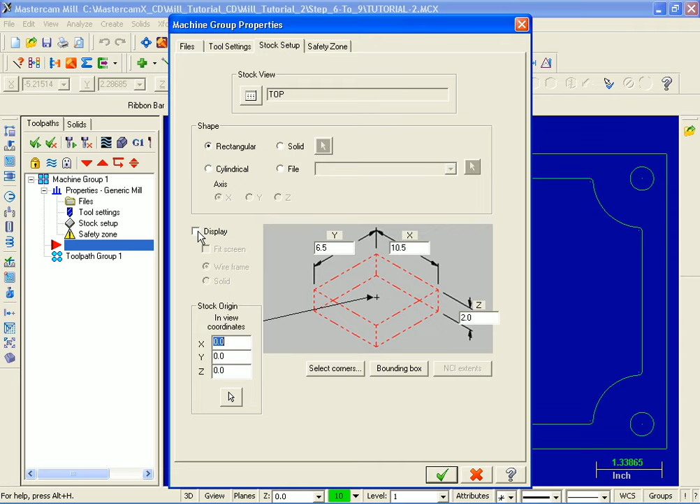Moving on up, I'm going to turn the display on and also put a check mark against Fit Screen. Next, moving up to the top, I'm going to select the Tool Settings tab. Our feed calculation is going to be taken from Tool. If we move over to the right in the toolpath configuration area, I'm going to switch on assign tool numbers sequentially and also check mark warn of duplicate tool numbers.

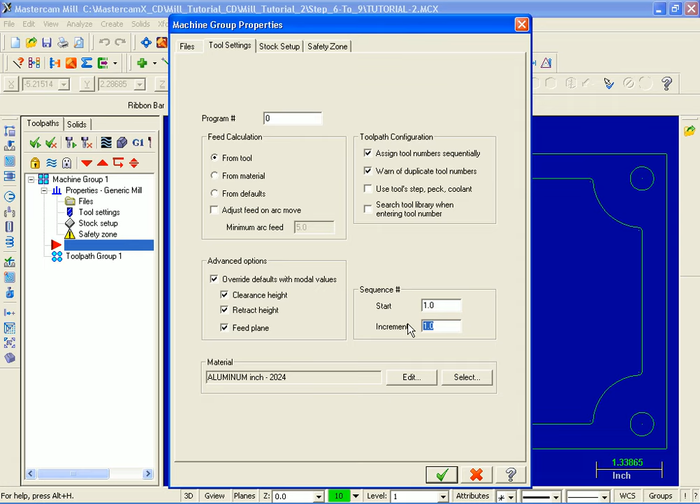Moving on down now into the advanced options section, I'm going to check override defaults with modal values and switch on clearance, retract and the feed plane. Moving over to the sequence number, I'm going to change the start to 1 and the increments to 1 also. Everything looks great here. I'm going to go down the bottom and hit the OK button.

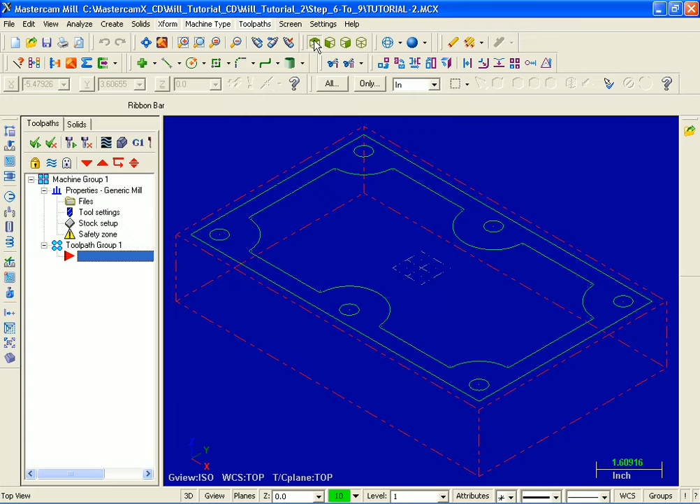Let's move on up and select the isometric view button followed by screen fit. As you can see, the red dashed lines represent the stock we've just set up. Let's move on up to the top now, and I'm going to select top view and again screen fit.

For step 7 we're going to spot drill the 6 holes. I'm going to select tool paths and then drill toolpath. Moving over into the drill point selection dialog box, I'm going to pick mask on arc. Now the prompt select arc to match, I'm going to pick this top left hand circle. As you can see, it selected it and the diameter here is 0.48438.

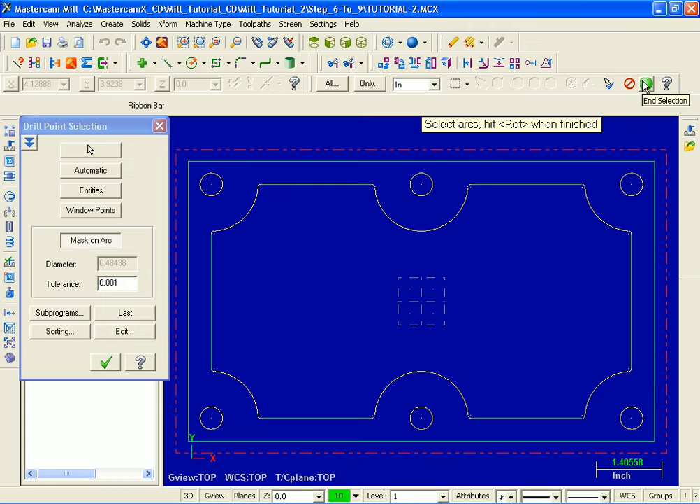Next I'm going to draw a window around the whole part, and it's selected the remaining 5 holes. I'm going to move up to the top right hand side of the screen and select End Selection followed by OK. Next we need to select a tool. I'm going to move down and hit the Select Library Tool button.

And what I'd like to demonstrate now is how we can use the filter to filter out a specific tool with a given diameter. First of all, in the Tool Types area, I'm going to select None to disable any previous tool selections, and then move on up now and select Spot Drill.

Moving up into the tool diameter, you can see I have it set to equal and it's at 0.75. So everything looks fine here. I'm going to pick the OK button to exit, and it's filtered out the appropriate spot drill. I'm going to select this drill and then pick OK. As you can see, it's set to tool number 1, but for the length offset I'm going to change that to 1.

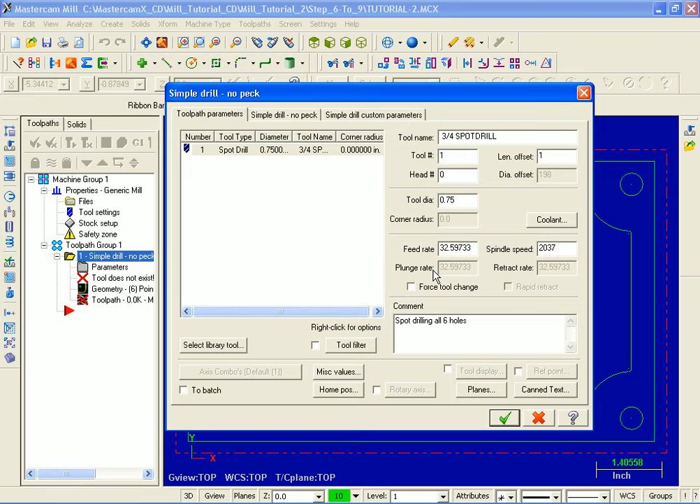I'm going to move on down to the comment section and type in spot drilling all 6 holes. Everything looks good here. What I'd like to do now is move over to simple drill, no peck. I'm going to turn on the clearance. As you can see, it's set to 2 inches and in absolute, so that's good. Moving on down, retract is absolute 0.1, that's great. Top of stock is 0 in absolute.

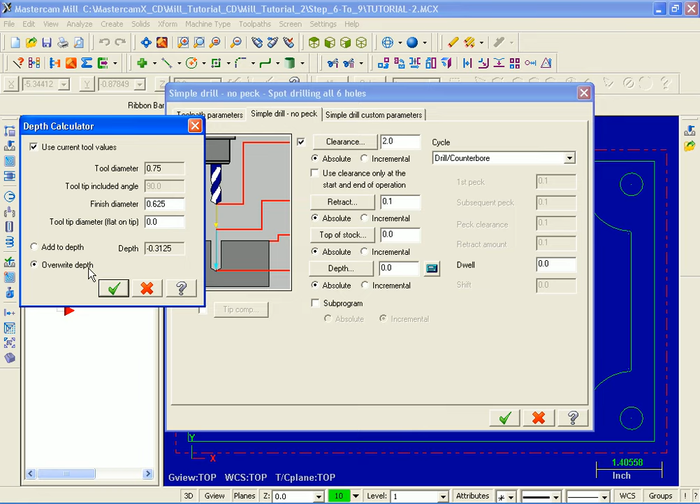Now, for the depth, we want to use the 0.75 diameter spot drill to chamfer the holes. So to calculate the depth, I'm going to select the calculator icon. Now for the finished diameter, what I'm going to do is change 0.75 to 0.625. I'm also going to move down and put a check mark against overwrite depth. I'm now going to select the OK button, and as you can see, it's input the correct depth for me.

Moving up to our cycle, we have it set at drill counterbore, so everything looks great. I'm now going to press the OK button. Now, to change the order in which the holes are spot drilled, what I'm going to do is select the geometry. Next, when the drill points manager appears, I'm going to right mouse button and sort options.

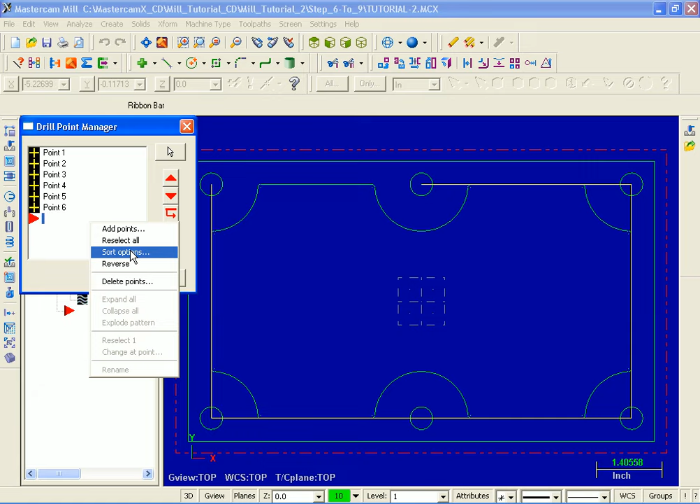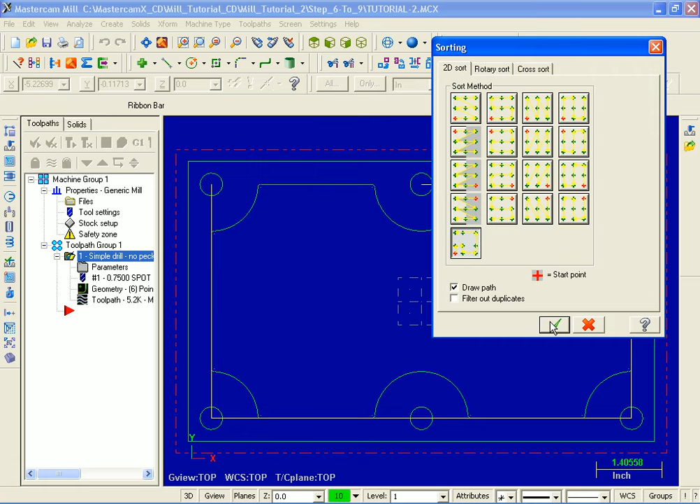Moving on down to the bottom left corner, I'm going to select point to point. I'll move this dialog box over here and pick OK. Now for the prompt, select sorting start point.

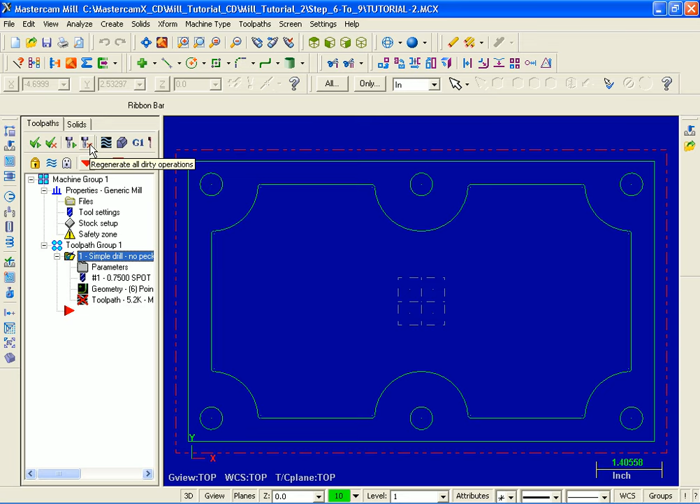I'm going to move over and select our top left hand hole. Everything's been sorted now, so I'm going to pick OK. As you can see, over on the left hand side we've got a red cross. I'm going to move on up and select Regen All Dirty Operations.

Let's move on to step 8. We're going to drill the holes now. Over on the left in the Toolpath Manager, I'm going to right mouse click and pick Copy. As you can see, I've only got one operation selected. I'm going to right click again, and this time paste. So we have 2 operations, and at present they're both exactly the same.

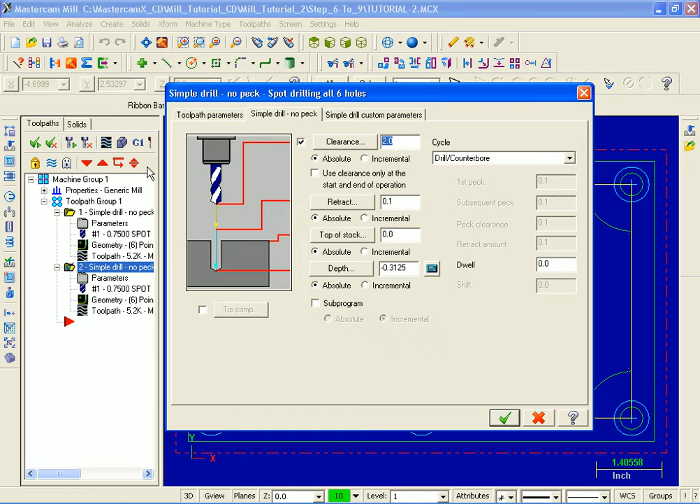For this second operation, I'm going to move into Parameters and select the Toolpath Parameters page. What we need to do now is set up the appropriate drill. I'm going to pick the Select Library tool and pick the Filter button. I'm going to select None and then move on up and pick Drill.

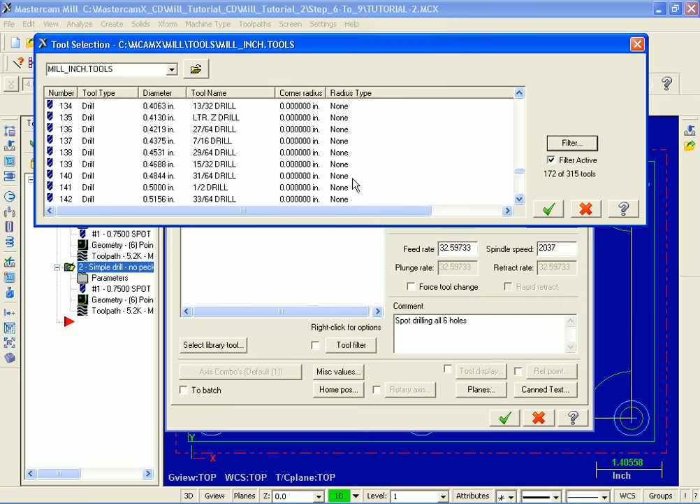For the tool diameter, I'm going to change that to Ignore. I'll move down to the bottom and pick the OK button. Let's scroll down and find our 31/64 diameter drill. There it is. I'm going to select it and pick the OK button.

First of all, we've got tool 2, and for the length offset I'm going to input 2. For the comment I'm going to type in drilling 6. So I've input my comment.

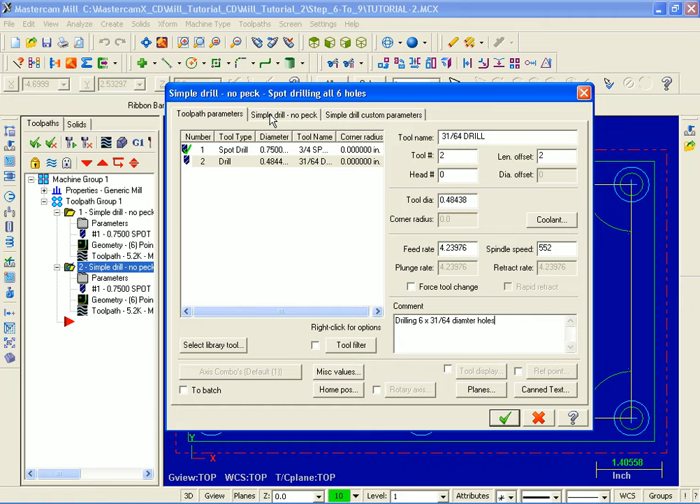Everything looks fine here. Let's move over to simple drill, no peck. Clearance is still on, set at 2. Retract 0.1. Top of stock is 0. The depth, I'm going to change that to -1.4.

I'm going to move down to the left here and switch on tip comp. Now I'm going to press the tip comp button. The breakthrough amount is set to 0.1. I'm just going to change it to 0. I'm going to pick OK.

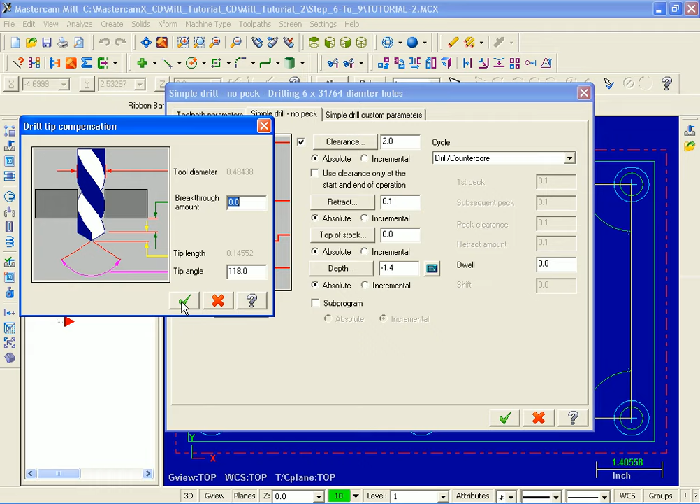Let's move on up now to drill counterbore, and I'm going to change this to peck drill. For the peck amount, I'm going to change that to 0.2. Everything looks great here. Go down to the bottom, hit the OK button.

As you can see, we've got a red mark. Let's go on up top and do a regenerate all dirty operations. Everything looks great. Moving on to step 9.

We're going to tap the holes. Over on the left in the toolpath manager you can see I've got the last operation with a check mark against it. I'm going to right click, copy, and right click again and pick paste.

Now for our third operation I'm going to go into parameters and move back to the toolpath parameters page. Now we need to go and select a 9/16 12 right hand tap. Let's pick select library tool, use our filter, pick none, and move on up and select taps right hand.

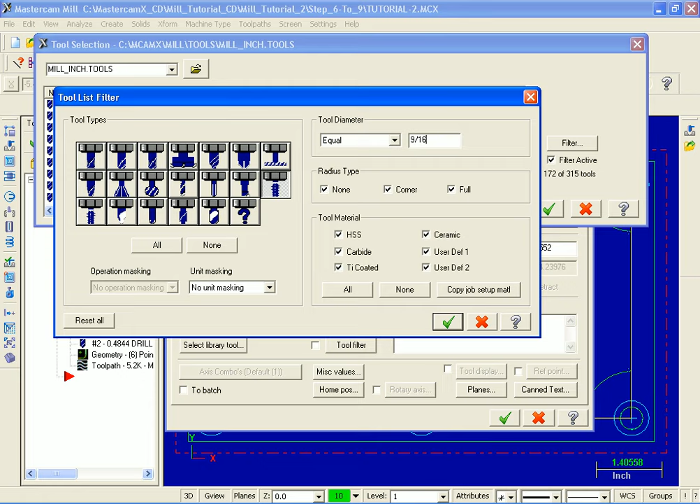Let's put in equal, and I'm going to type in 9/16, enter, and then pick OK. So we have two selections here, 9/16 12 and 9/16 18. I'm going to pick the top one, the tool we want, and pick OK.

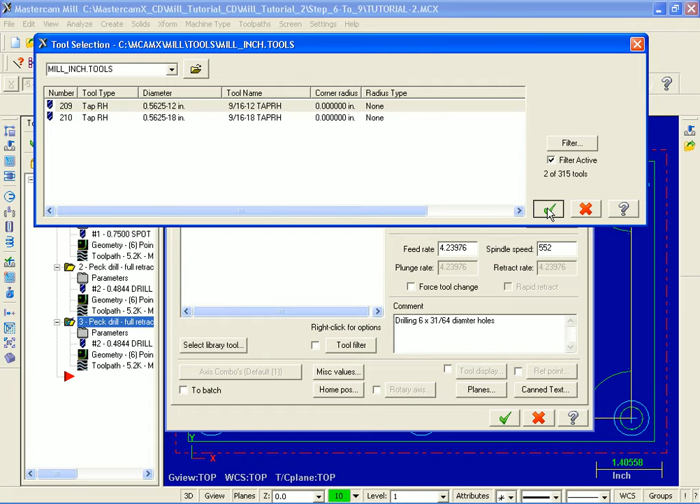Tool number 3, I'm going to change the offset to 3. Moving on down to the comment, tapping 6 9/16 diameter holes.

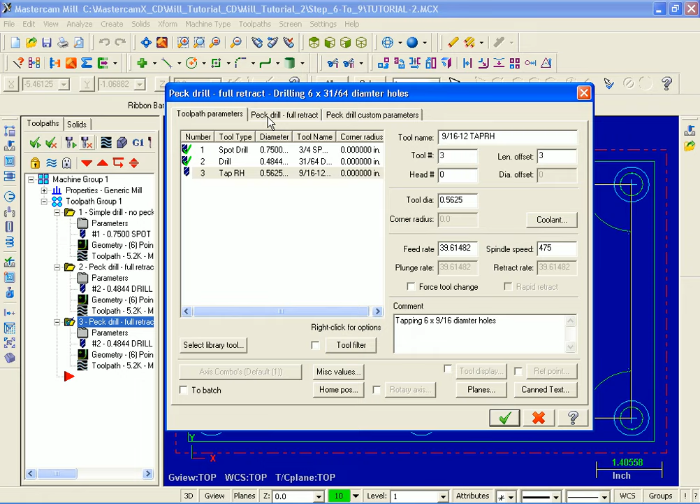Everything looks good here. Let's move over to the next page, peck drill full retract. The first thing I'm going to do is change the cycle. Let's open up and we need to select tap. Clearance is fine. Moving on down, retract is good. Top of stock 0 is good.

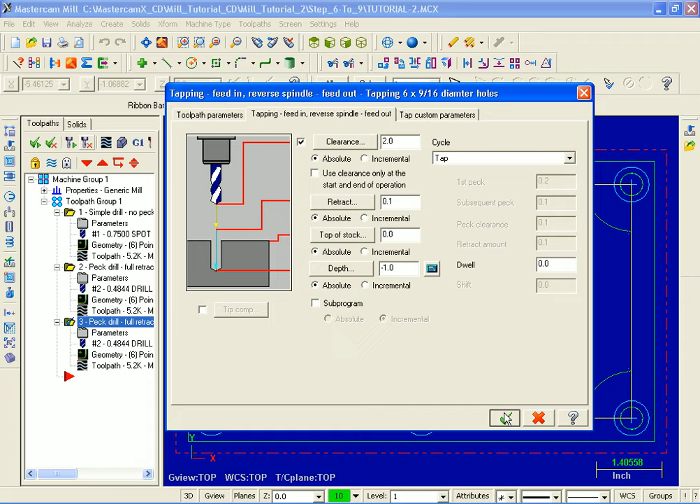I'm going to change the depth to -1 and also move over and turn off the tip comp. Everything looks great here. Let's go down the bottom and hit the check mark. As you can see, I've got a red cross down here. Let's move on up and do a regen.

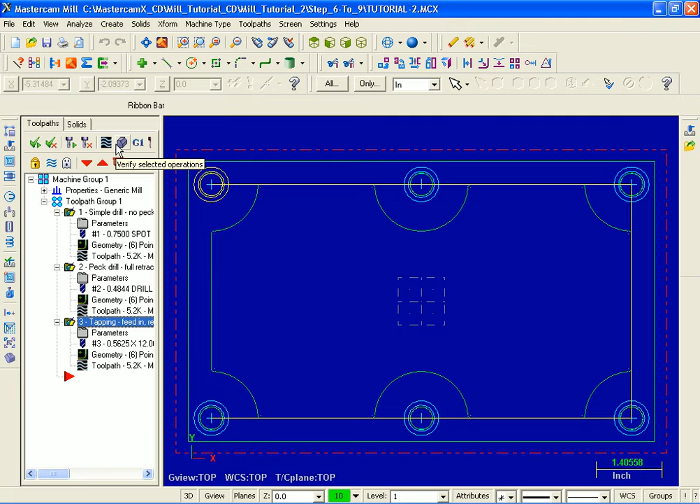Let's go and verify the tool motions we've created. I'm going to move over and select all operations, then back up to the right, and we'll verify our 3 operations. I'm going to move on up to the toolbar, get an isometric view. In the verify dialog box, I'm going to slow the speed down and then move on up to the top and hit the machine button, the play button.

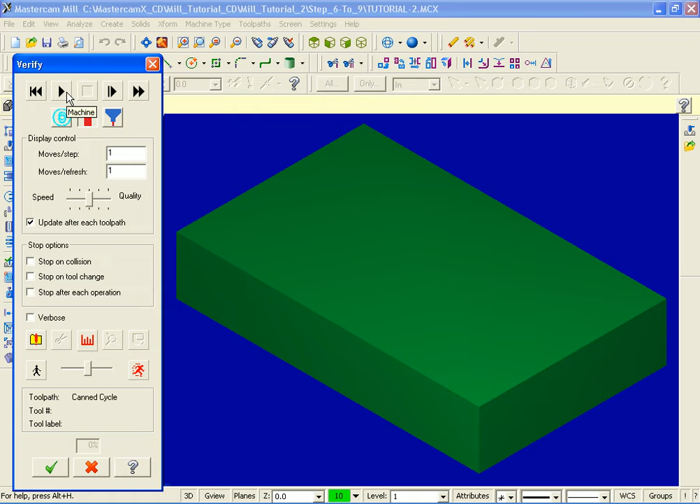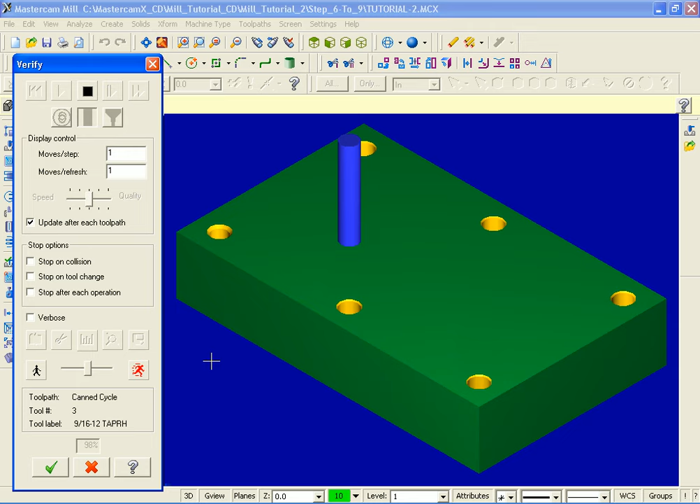Up first is our spot drill operation, followed by peck drilling, and finally our tapping. I'm going to pick OK, and that completes this video segment. Thanks for watching.